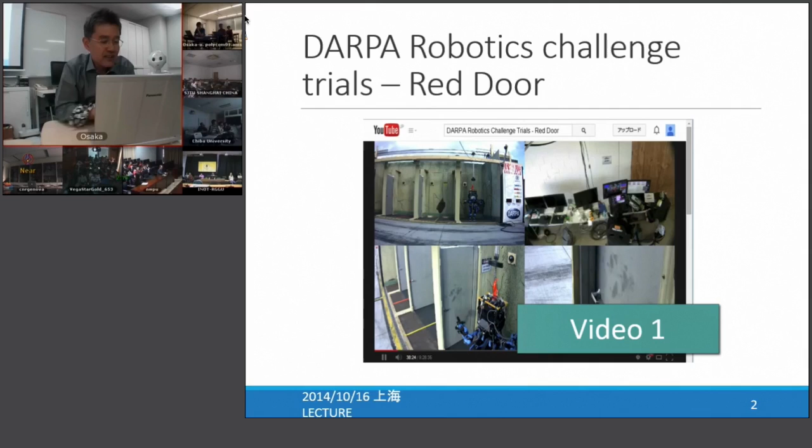And then please see the next video, in which our muscular skeletal type robot opens the door. Will you please start the next video? Yeah, the code isn't good. Is it real time? Yes, it's real time.

You could see that in the second video, the muscular skeletal robot moves very naturally to open the door, right? Actually, the trick is we just apply random input to each muscle. So basically the motion is not really programmed, but the body naturally realizes that kind of door-opening task. Whereas in the first video, the robot is really hard-coded, programmed to open the door, and you can see the speed. You can easily understand what kind of function the muscular skeletal system is providing.

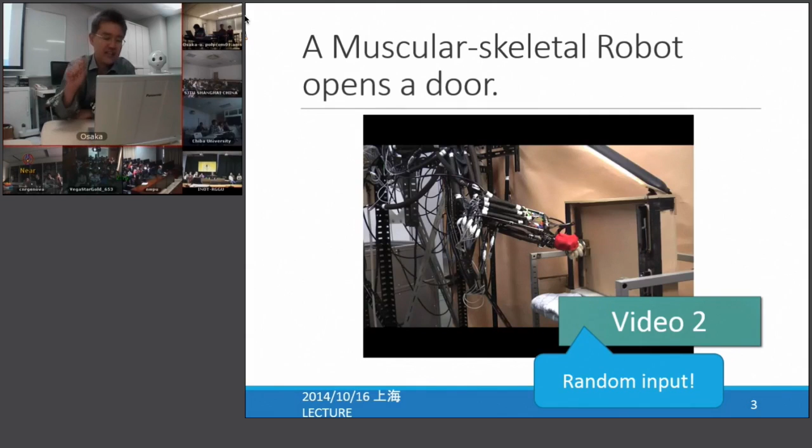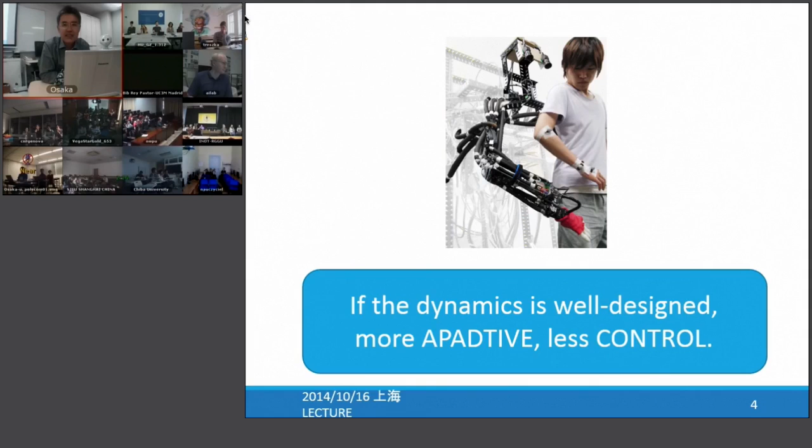Okay, that's the essence of my talk. So if the robot's muscular skeletal system is well designed, it will be more adaptive and it needs less control. This is the take-home message for you now.

Of course, generally speaking, designing dynamics for adaptive behavior is a kind of open problem. You can design whatever you want to realize the adaptive behavior. But because it is a completely open problem, it is really difficult to come up with a very clever and nice design. So maybe the best start is to mimic humans or animals and try to reproduce the musculoskeletal structure as much as possible, so that you can understand what kind of functions the system has. This is what we call bionic robots.

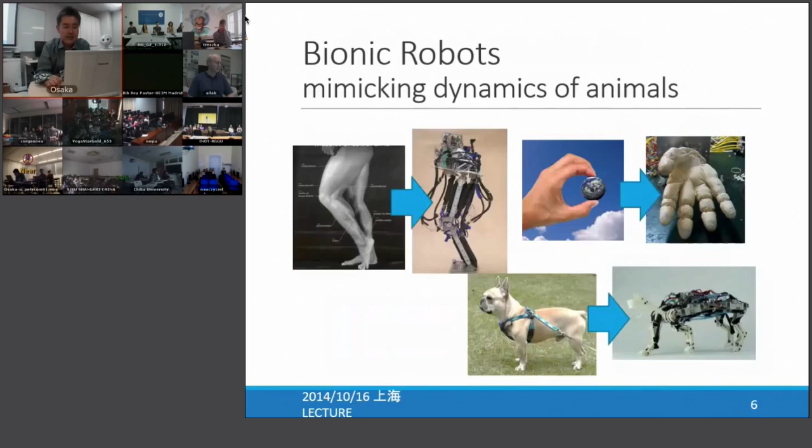In this sense, we want to reproduce to some extent the biological system with robots. Following this philosophy, we developed several kinds of bionic robots. These are actually some of, not all of, our robots. We have developed maybe 30 to 40 robots, and each robot basically tries to mimic, to some extent, the structure of the human.

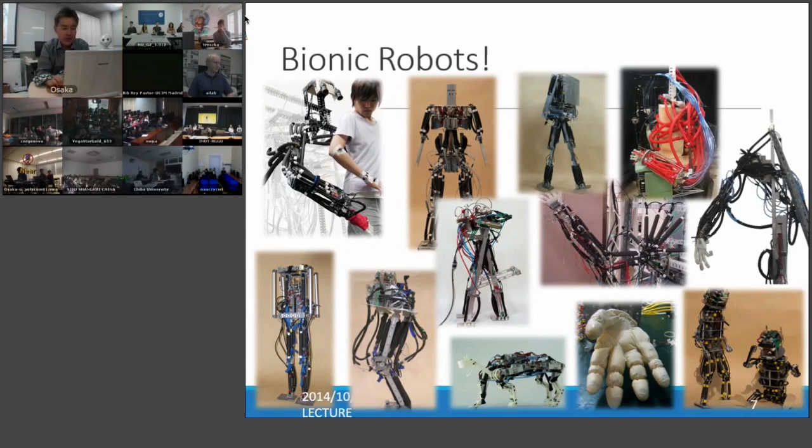I will pick 3 examples from these robots in this presentation. Basically, our premise is that the muscular skeletal structure is the key for adaptive behavior.

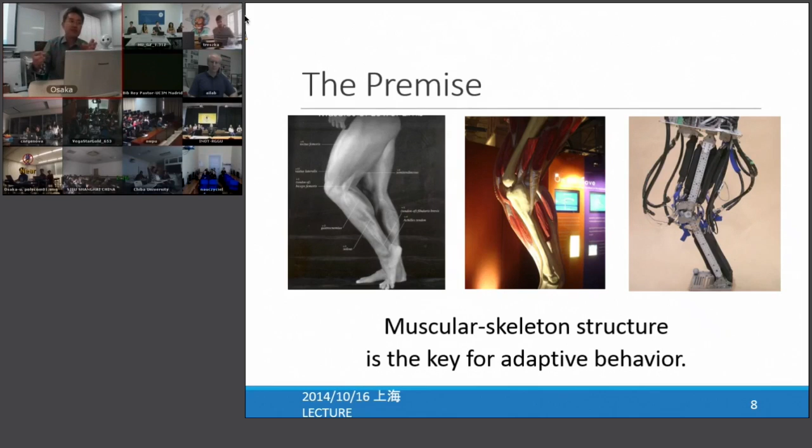We cannot use real, living muscle, so instead we use what we call artificial muscle, built from a rubber tube and a plastic sleeve. If we put the plastic sleeve on the rubber tube, then when we put air into the rubber tube, it will bulge and simultaneously generate force along the longitudinal direction. This is what's called the McKibben type artificial pneumatic muscle, and we basically utilize this muscle in every robot.

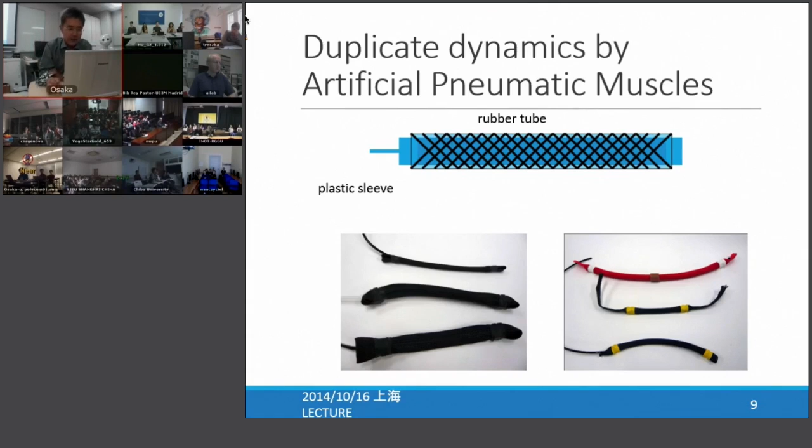In this presentation, as I told you, we are going to pick 3 examples. One example is dynamic walking and balancing, and also hopping. And finally, we talk about dexterous manipulation.

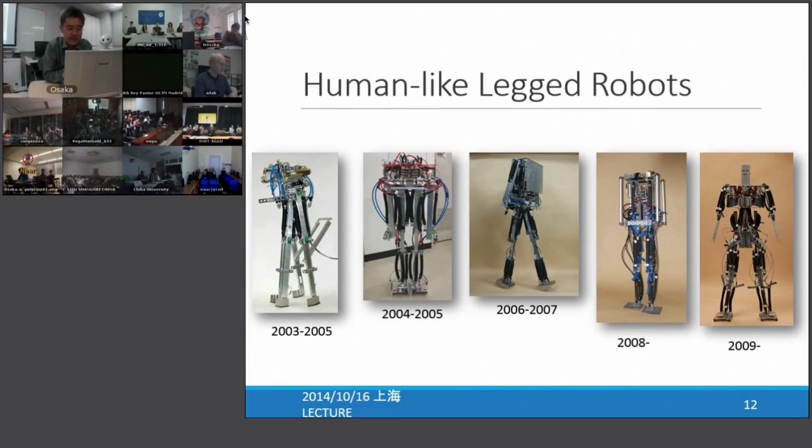And I will show 2 robots out of this list. The first robot is what we call Pneumat-BB. This is a bipedal robot, and actually it's constrained in 2D, so we can call it a 2D walker. Additionally, it is driven by pneumatic muscles, as I already introduced, and also the structure of the muscle is almost similar to the human.

The amazing thing is that normally, if you build a humanoid robot, you have to put many kinds of sensors - for example, a gyro sensor, angle sensor, and also an accelerometer to sense the attitude, and so on. Sometimes they put vision as well, and touch sensors. So many sensors, basically. But for walking, this robot only needs 2 touch sensors and nothing else. For example, we don't need any gyro sensor. Just 2 switches make it work. And we'll see how it works.

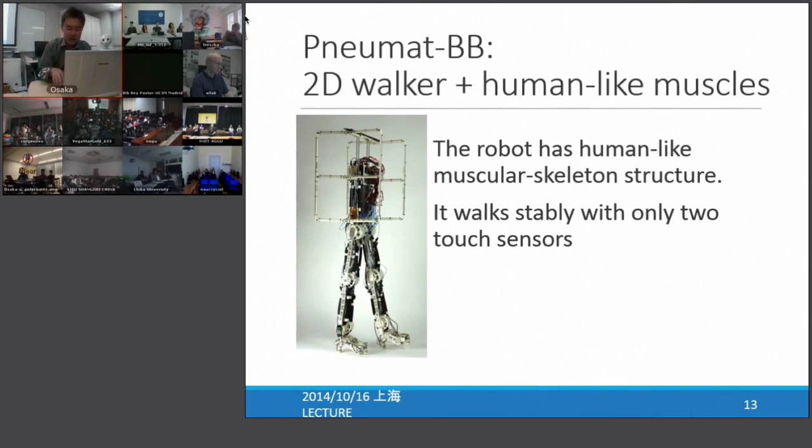Okay, Nathan, will you please start video 3 now?

So the robot is moving, walking on the moving plane. And if the robot touches the ground, then the other leg starts to swing. That's the only control program for the robot. So the programming is really simple, but it works forever, and it can keep its balance. And also, you can see that the walking is relatively adaptive, right? They are stable, I must say.

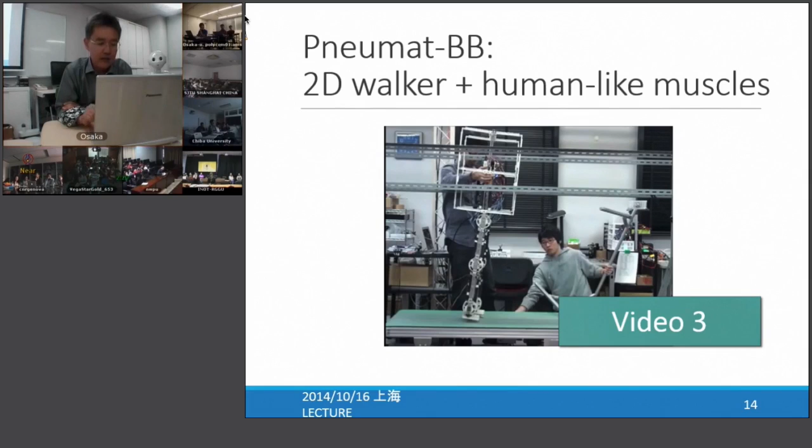And as I explained, the robot has a similar structure to a human, so let me explain a bit about the structure of the human. We humans have a joint, and the joint is driven by 2 muscles basically - one is pushing, so it goes this way, and the other is pulling, so it goes this way. So one joint is controlled by 2 muscles basically. But medical observation says...

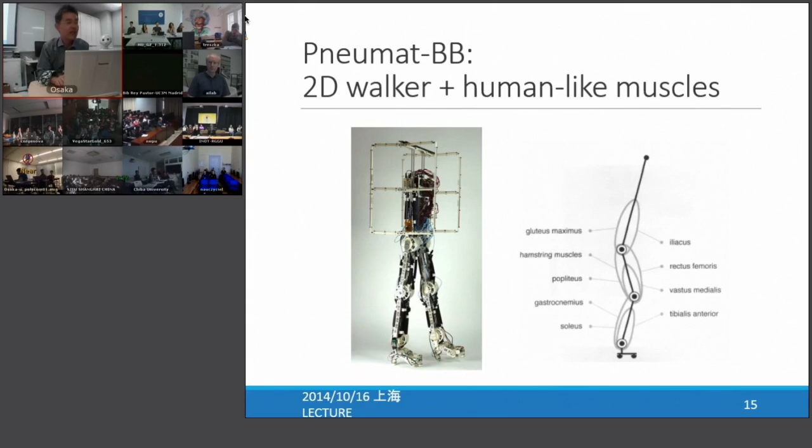We humans have 9 muscles to control the lower leg, not only the muscles which we call antagonistic - meaning one joint is controlled by 2 muscles in opposite directions. To control 3 joints, we only need 6 muscles. But the lower leg has 9 muscles, meaning 3 additional muscles. What those 3 muscles do is go not just from this way to this way, but from this way to this way - meaning one muscle controls 2 joints simultaneously, which we call a biarticular muscle. They say that this kind of biarticular muscle really contributes to coordination between joints. So if you want to coordinate the motions of joints, you don't need a program, but you need biarticular muscles instead. That kind of idea is applied to the robot, and as a result, the robot can walk very stably on a flat plane.

And we actually extended the idea not only to the biped, but also to the whole body humanoid, which we call Pneumat-BS. This robot has basically a whole body, not only the legs, but also the torso and the arms.

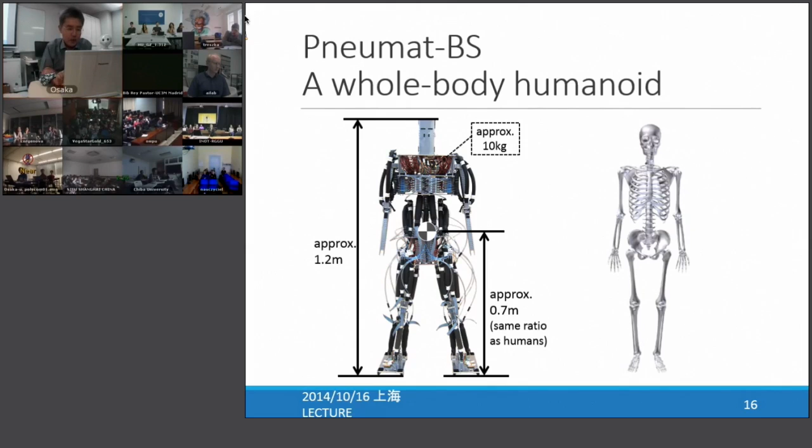Because this robot is driven by pneumatic artificial muscles, it's completely compliant, so if you apply force to the robot, it can be powerless. I mean, if you have a robot like this, the Pepper, it's driven by electric motors, so it's very stiff. This one, because the robot doesn't have electricity now, it's really soft. But normally, if you apply electricity, it's really stiff. But this Pneumat-BS, because it is driven by pneumatic actuators, pneumatic artificial muscles, it is completely compliant, and you will see in the video.

Will you please start video 4 now?

So there are several joints, but applying the force, you can easily move it like this.

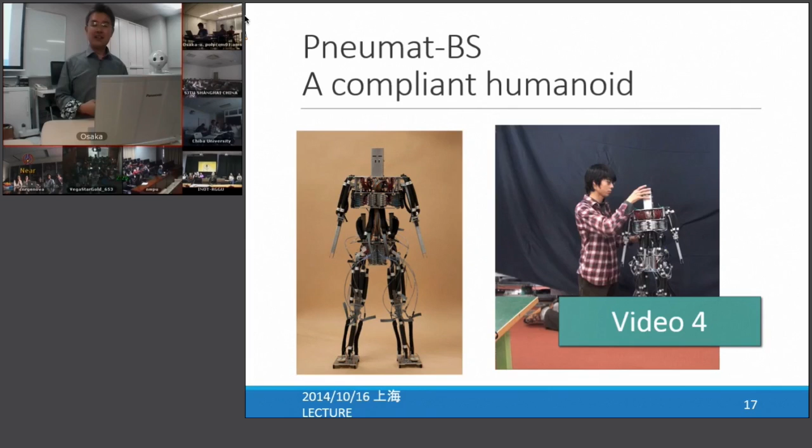So for this kind of robot, standing still is a very big challenge. If the robot is really stiff, just power on, and it stands up, that's it. But for the robot which is really compliant, you have to apply compliance to move and stand the body up.

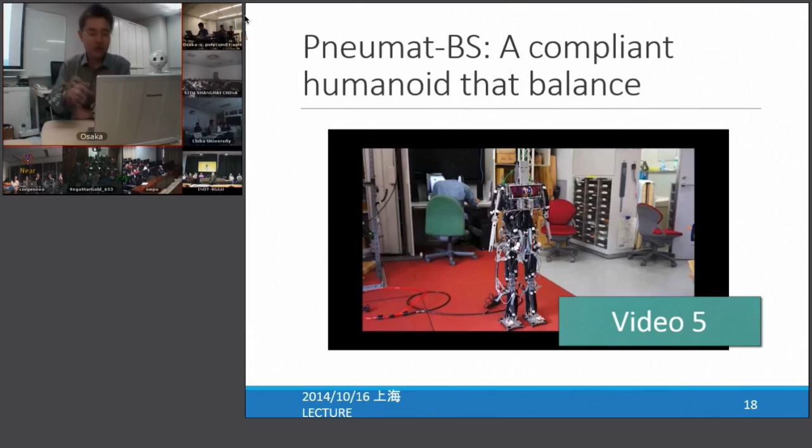And by extending this kind of idea not only to the humanoid but also to the quadruped, we also realize the quadruped robot walking, what we call Pneupard, because... Can I ask a quick question? Yes, so I mean, dynamics.

The term dynamics is used in different ways in different areas. Right. Could you perhaps briefly explain, just very briefly, the way in which you are using the term dynamics? Thank you very much for your suggestion.

In my presentation, dynamics means, for example, mass, spring, or damper - basically the properties which consist of our body. For example, if you have mass in your arm, you can swing it really naturally, right? This is exploiting dynamics. Okay, this is the sense of dynamics in this presentation. Thank you for clarifying this.

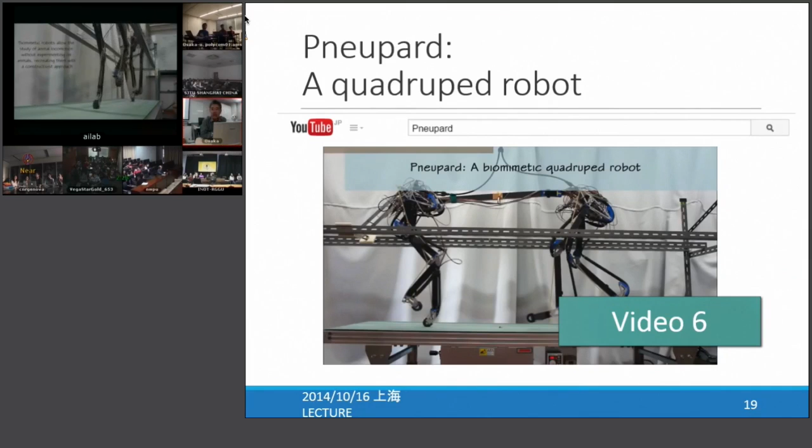Yeah, this is again 2D. Now we are conducting the steps in 3D that are not yet presented, I must say. Okay, thank you very much.

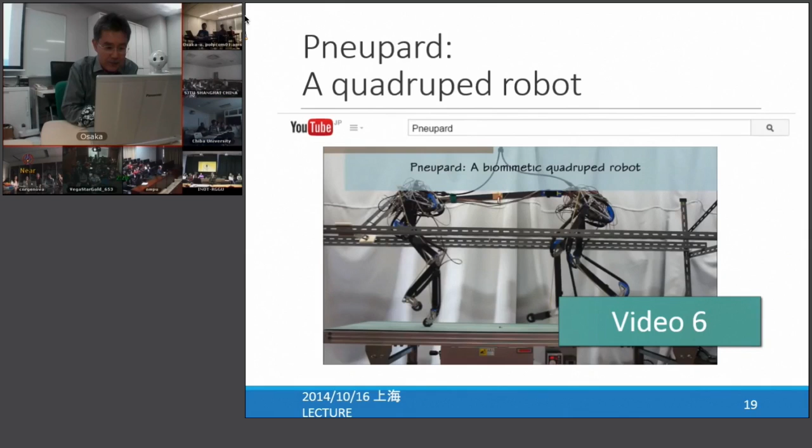The fundamental message is that for the quadruped, the robot only has 4 touch sensors again - not gyro sensor, no angle sensors, but 4 touch sensors at each tip of the legs. And also pneumatic actuators - if you are really particular about the controlling stuff, then controlling pneumatics is the last thing you want to do. I mean, controlling pneumatics is really, really difficult because of the fluid dynamics.

But because we properly design the body, we don't have to take care of that kind of property, but we just apply a kind of pre-programmed sequence. So the compliance will deal with the change of the environment, and we don't need too much computation. Because of that, we normally use a very simple, very small CPU. For example, for the walking robot, we use only a 16-bit chip, driven at 16 megahertz.

Whereas, if you control this kind of robot conventionally, you need large computer power. So this is a very important message of my presentation: if you properly design the robot - I use the musculoskeletal system, for example - you can reduce the computation, but still the robot will move properly.

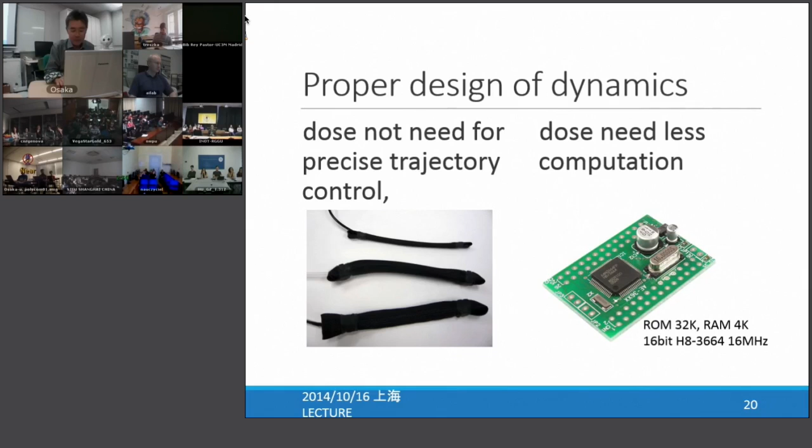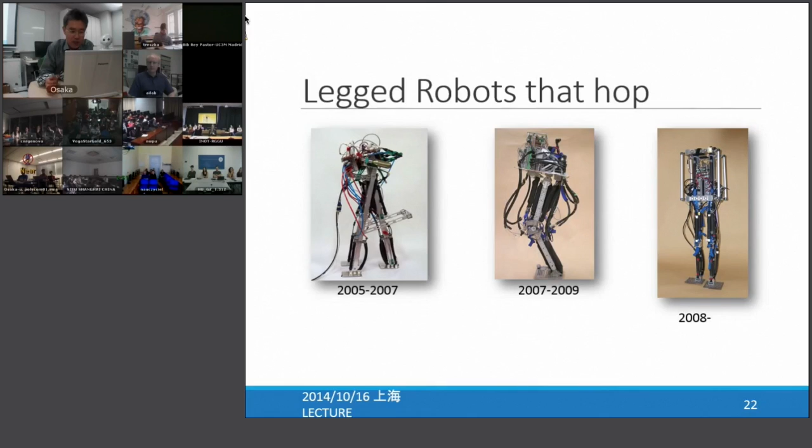Now we are moving to the next topic about hopping. Not only walking, but we also studied hopping, and we developed several types of hopping robots. Out of these, I want to pick one robot which we call Que-Kaku, meaning the air leg in Japanese.

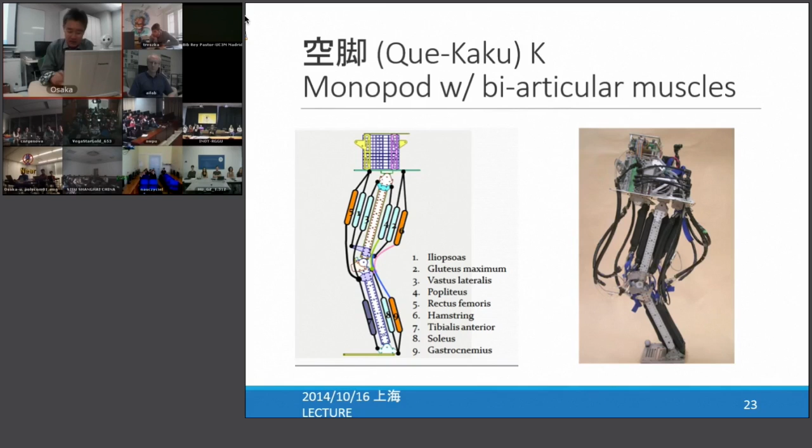This robot is a monopod with biarticular muscles, as I explained. Basically the structure of the muscle is the same as the robot I showed earlier, the robot walking on a flat plane. Applying the same idea, using the muscles to coordinate between joints, we can easily make it hop. Okay, will you please start video 7 now?

Okay, maybe once more. It's a quick video. You see that the movement is really natural, right?

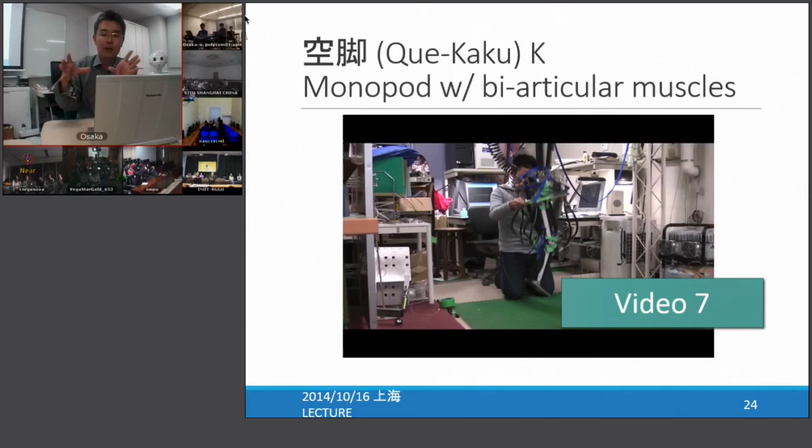The robot has only one sensor, a touch sensor, so that it can sense the timing of the touch. After the robot senses a touch, it will pursue the motion by a fixed sequence of the muscles. So the program is relatively simple, but you can see that the hopping is relatively stable.

We think that kind of stability is brought by the structure of the muscular skeletal system. By imitating more about the human body, the required control for hopping becomes simpler. The message again is: if the body is well designed, simple control enables hopping.

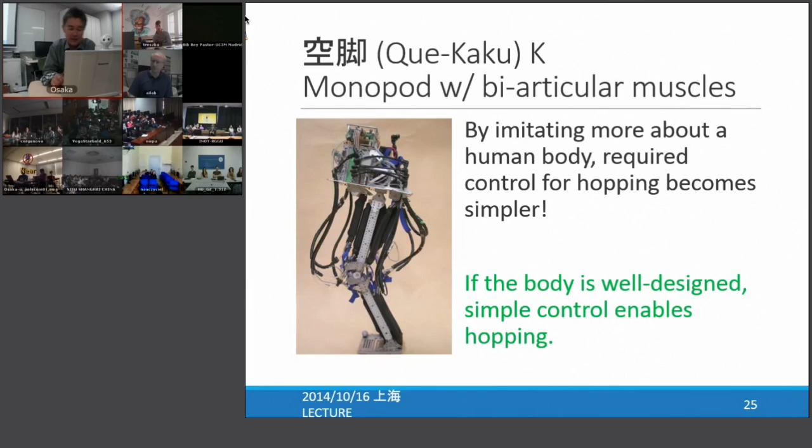Because the robot only hops, we want to make it not only hop but walk. So we put two of them into one robot and made it a bipedal robot like this, and tried to realize the hopping by the robot.

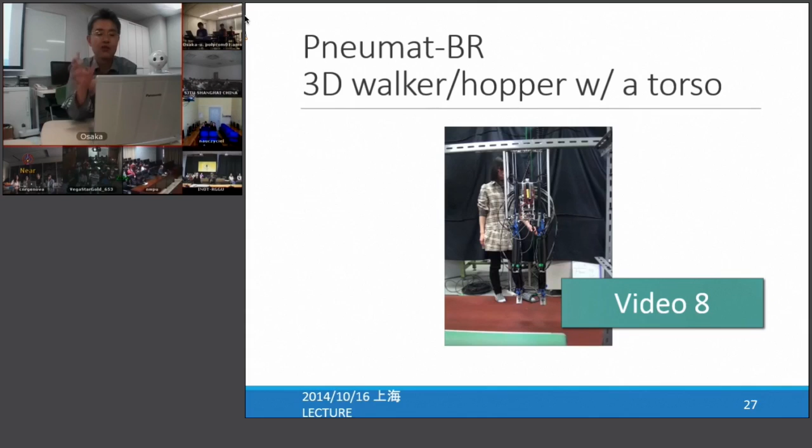And of course, since this robot is biped, it can walk. We also did an experiment to make it walk, but unfortunately this video maybe I didn't upload, so maybe we cannot see this.

But the very interesting thing is that the robot can jump up that kind of high, and the same robot can walk on a flat plane. So it can realize multimodal locomotion, two modes of locomotion, with the same hardware. That's a very interesting point. This is a good demonstration of adaptively changing to the situation.

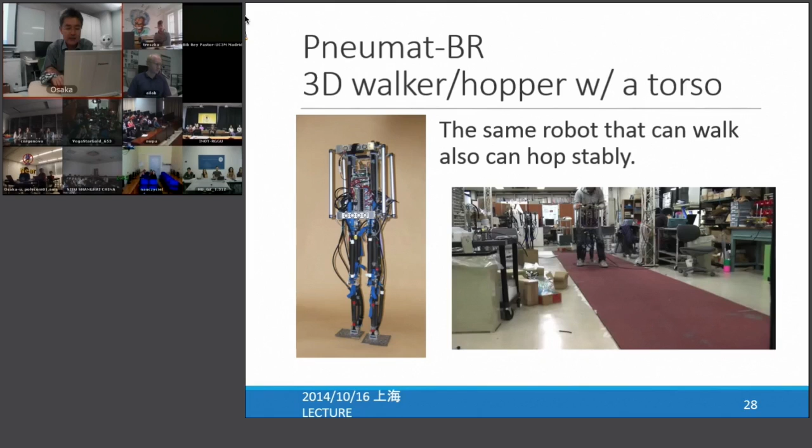Okay, so finally we go to the last example. For a human-like body, it is easy to achieve human tasks, again without too much computation. To prove this, we developed the upper torso and the arm.

This robot basically mimics the fundamental structure of the human body, and has, as far as I remember, more than 40 muscles on the robot. So it has a lot of muscles. It also has a hand. And we put two cameras on top of it, but we still don't have too much program implemented on it.

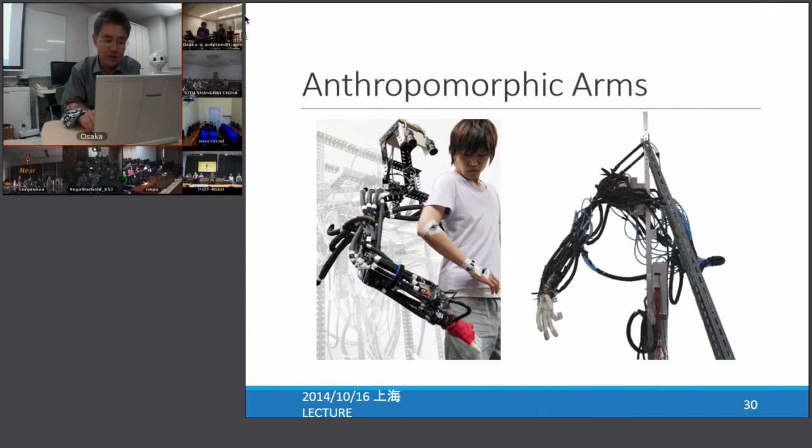As I explained, the structure tries to mimic the human, and if you observe the human body, we learn a lot of interesting features. For example, the wrist is a kind of semisphere, and it can rotate like this, and like this, but not like this. If you want to rotate along this axis, these two bones will twist like this.

If you realize this by the robot, you put 3 motors here, so the robot moves like this, like this, and like this. The movement is a bit different in between. And as I explained, these 2 bones are also utilized for this twisted motion, so in this robot we also mimic that structure of the human with these 2 bones.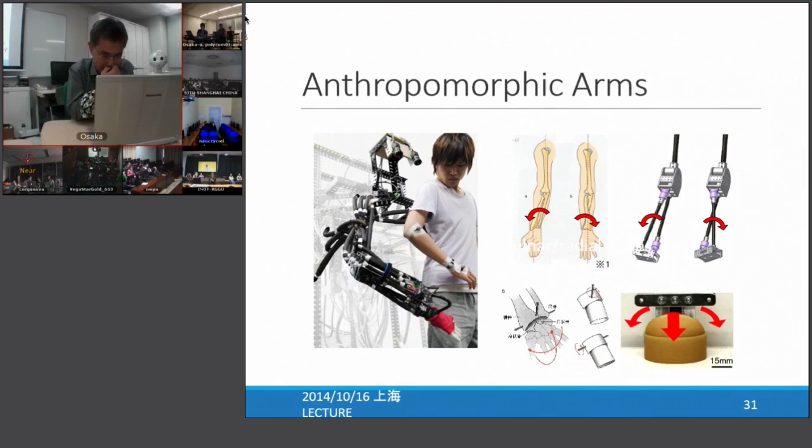These are basically the muscular skeletal structure of the robot. You can see many muscles on the robot. If you know something about anatomy, you will realize which muscle is which, but here you don't have to understand this. You see many muscles, and the structure of the muscle is really interesting.

For example, to twist it like this, we have 2 muscles here and here. I actually forget the names, there are several names, but there are 2 muscles to twist the hand, to twist the wrist like this.

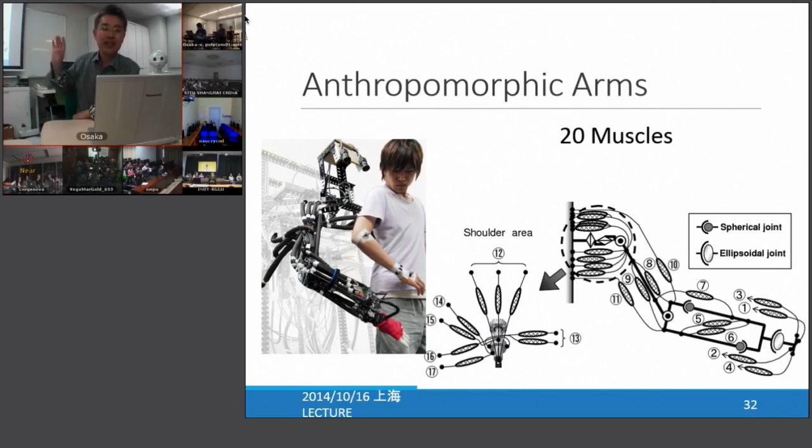Because we designed it very human-like, it is applicable to human-like tasks, for example the task of opening a door. This is actually the same video as I showed earlier, but it's nice to see it again. Will you please start video 2 again?

Now you can see what is going on in this video.

Because the robot has the same structure as a human, even if you apply random excitation to the muscles, the robot will move really human-like, since it has the same structure as a human. Our environment is basically designed for our body. For example, the doorknob is designed for our body. If the doorknob is placed on the top or bottom of the door, it's really hard to twist it, right? But if the knob is in front of you, it's easy to open. This is a good example to explain that the environment is designed for your body. Because a robot has the same structure as a human, it's also easy for the robot to open the door. That's the trick of this experiment.

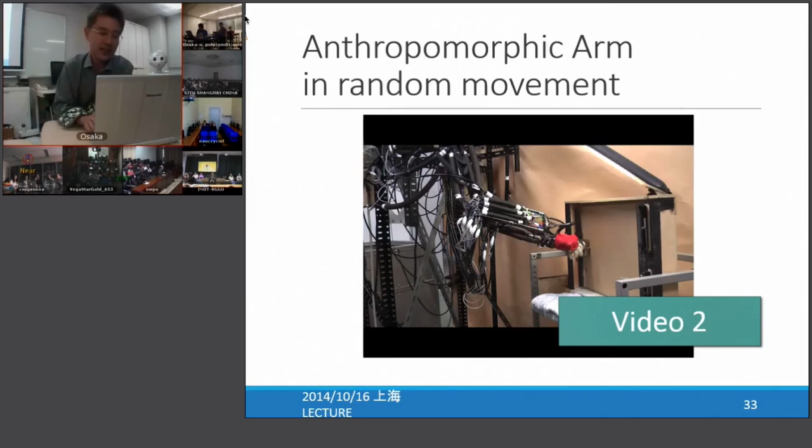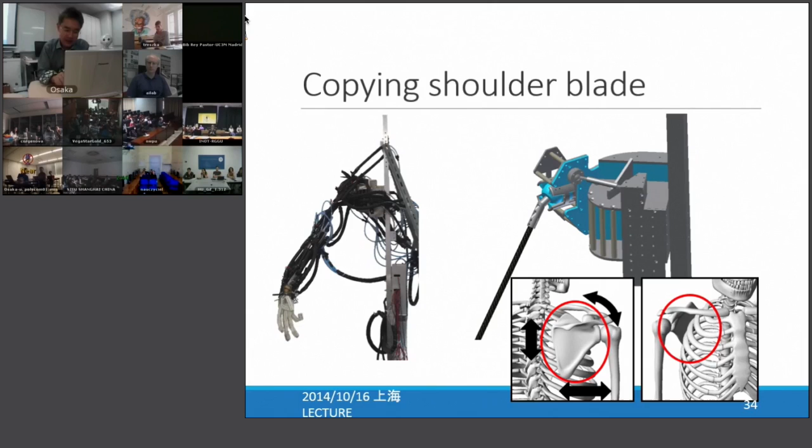We also try to mimic the shoulder blade, because it's one of the most complex structures of the human body. So it's a very good trial to mimic the motion of the shoulder blade, and now, currently, we realize this kind of motion.

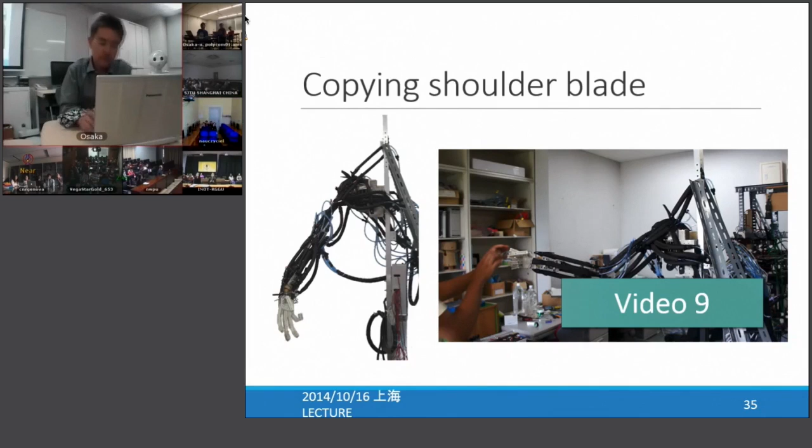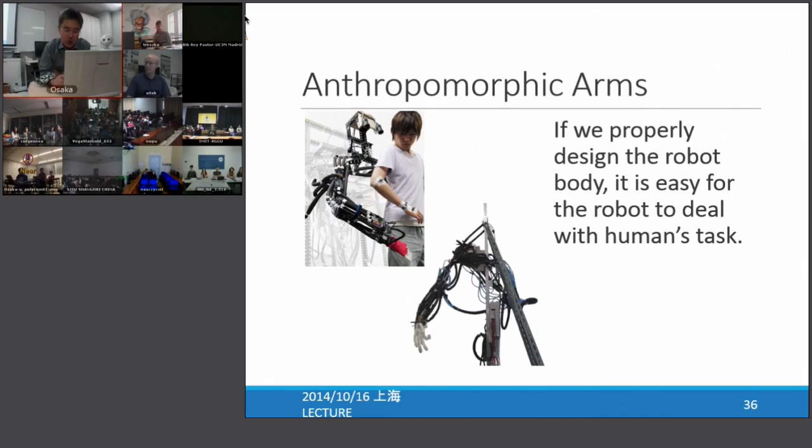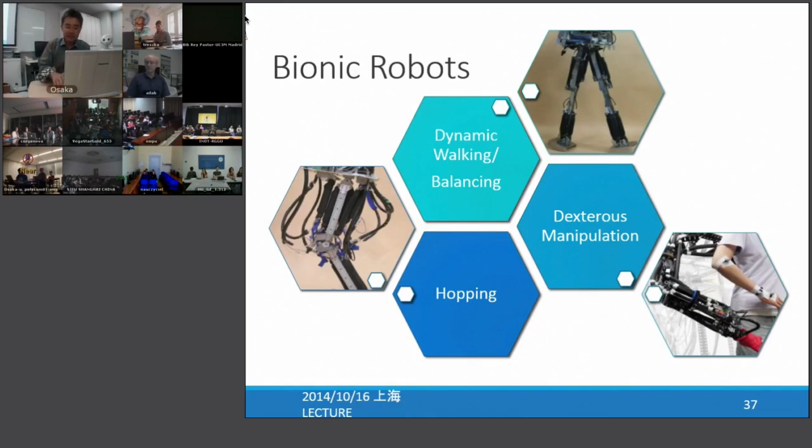The conclusion of this experiment is that if we properly design the robot body, it is easy for the robot to deal with human tasks. So through these three examples, we see how adaptive these bionic robots are. The take-home message is that designing dynamics for adaptive behavior is basically an open problem, but mimicking humans or animals is a very good start to understand adaptive behavior.

And this is what we call bionic robots. Okay, this is the end of my talk. Thank you very much.